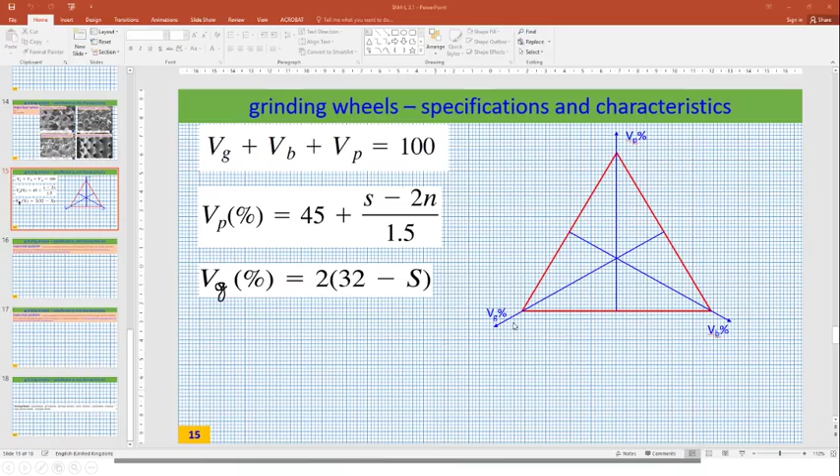There is a feedback which is coming. I don't know where from it is coming. Just a minute, bro. Hello, now the feedback has stopped. However, this is going on.

So this is lecture number 3.1 and 3.2. This particular presentation will take possibly 2 hours or more to cover this class. So today we have 1 hour, and tomorrow once again we will get 1 hour and we will cover it.

Earlier, lecture number 2.3 has been uploaded in YouTube. The channel as well as the video link has already been shared with you. So next Saturday, let me find out who is trying to join.

Coming Saturday, we are going to have quiz number 3. This would be possibly a 40-minute quiz. It will start at 9 and continue to 9:40, and after that I'll take the normal class. This would be on grinding cycle.

Hello sir, yes, I think you are muted, sir. I am muted, not able to. Okay, let me see. Just a minute. Hello, yes, I am muted. I am sorry, okay, I'll start again. Now I believe you can hear me. So already, now we can hear you. Yes, thank you so much. Thank you for reminding me that I was muted.

So as I was saying, lecture number 2.3 has already been uploaded in YouTube. The video link as well as the channel link has been shared.

Today we are going to cover channel lecture number 3.1, and 3.2 we would be covering tomorrow. Coming Saturday, which is hopefully 3rd of October, if the date is wrong I'll correct it later and post it in Microsoft Teams, we will be having a quiz on grinding cycle.

It would be primarily numerical. It would be a 40 minute quiz or 30 minutes quiz starting at 9 to 9:40 or 9:30. Once the quiz is over, after a 5 minute break, I'll take the class. So this is what it is.

Your performance in the quiz is very good. The average of the class is very nice. Hopefully the performance is individual performance, not collaborative, that is up to you. I hope people are not taking help from each other and attempting the quiz on their own.

So I'll display the quiz marks for some time. It would be posted very soon. So this one is quiz 1, this one is quiz 2, and this is the percentage in both the quizzes.

So if you look at, say for example, Kailash Raja, his... Sir, we can't see the screen. Sorry, we can't see the screen. You cannot see the screen. Okay, what is happening with me? Yes sir, now it is visible. Yes, initially I was speaking without unmuting myself, I was presenting without sharing the screen. Something is wrong with me today.

Okay, so this is your quiz 1 performance, this is your quiz 2 performance. Let us take the example of Kailash Raja. Are you there, Kailash? Yes sir. Yeah, your performance as it stands today is 69%. So there would be more quizzes, altogether there would be 8 or 9 quizzes and 2 assignments. So you have enough scope to improve.

Another example I will take. Let us take the example of Ritesh. Are you there, Ritesh? Ritesh, are you there? If Ritesh is not there, let us take the example of Gajanan. Gajanan, are you there? Is that Gajanan? No, this is Gajanan. Gajanan, are you there?

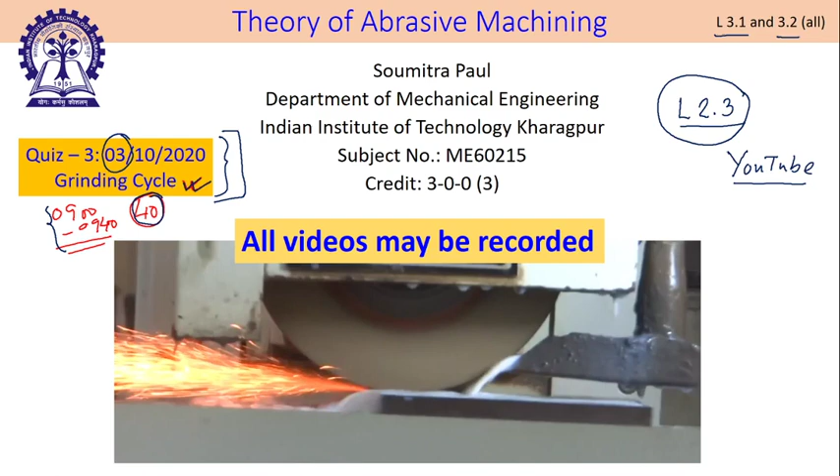So as you can see, this week's class test is on grinding cycle. So if someone says I do not know grinding cycle, you have not taught what is work speed, what is down feed - yes, the questions are on grinding cycle, but whatever has been covered from the very first class, everything is part of it. Today I do not have a table clock in my room, so whenever it is 9:55, please tell me. Let us start the class.

So today what we are going to do is talk about a particular module, module number 3. This is on grinding wheels: specification, their characteristics, and how they are fabricated. This is a descriptive chapter. Whatever I am covering in class, the same material is available in Malkin's book. Try to get a digital copy of Malkin's book, you will get to know.

Now, this is a specification of a grinding wheel. As we know, a grinding wheel is made up of abrasive and bond, and they are fired - I should not say baked or sintered, but the technical term used is fired - and then you get a grinding wheel. This is a disc type grinding wheel used in surface grinding, and in this you have the grits on them, and these grits are bonded to the grinding wheel by a bond. This is the specification of a grinding wheel, which is a conventional grinding wheel. This is a specification of a conventional grinding wheel.

What do you mean by conventional grinding wheel? The grits which are used are either alumina or silicon carbide. Other than conventional grinding wheel, there is another group called super abrasive grinding wheel. The specification system for super abrasive grinding wheel is a bit different. A grinding wheel is called super abrasive grinding wheel provided the grits used are diamond or cubic boron nitride. I believe I have already indicated that. Otherwise, at the undergraduate level also you have learned this.

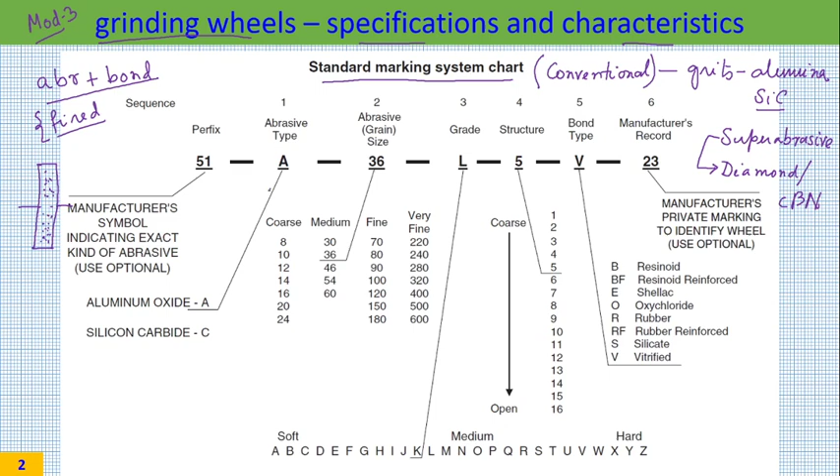Now, this specification system reported in different books is different. However, the specification given from this end till this particular end is universal. This prefix and manufacturer's ID may be there, may not be there. Unfortunately, this prefix spelling is wrong - this has been copied from Malkin's book, but however, somehow there is a typographical mistake in Malkin's book. I cannot help it.

So what is there - it talks about what is the abrasive type, what is the abrasive size, what is the grade, which is - there is another technical term for that, which is hardness - what is the structure of the wheel, and what kind of bond has been used. The other two things, that is the prefix and manufacturer's record, you forget it. You can read that from the book. I would cover only these types. So let us see what are they.

So there are different kinds of abrasives, as I said. Abrasives are alumina, A for alumina, C for silicon carbide - these are the two conventional grits. B for cubic boron nitride and D for diamond.

This is a coincidence that ABCD comes in strangely in the specification of the abrasive wheels. Abrasive type, the material of the abrasive, is indicated by the first alphabetical letter. Here it is A, so it is aluminium oxide. Had it been C, it would have been silicon carbide. Had it been B, it would have been CBN, but other specifications would have been different. Had it been D, it would have been diamond.

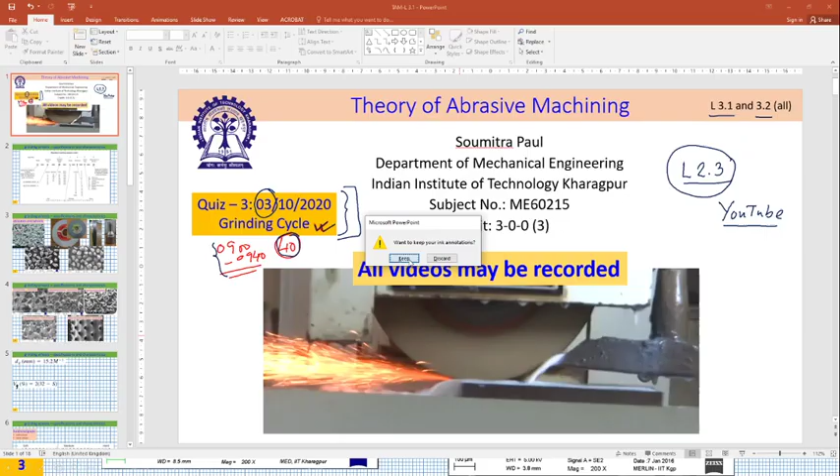Now these are this type of wheel. These are disc type wheels which are used for surface grinding operations. This type of wheel can also be used for cylindrical grinding and centerless grinding operations.

For surface grinding operation, typical diameter is 150 to 250 millimeters. That is the typical diameter. For cylindrical grinding, it is much larger.

I do not understand why am I getting a request all the time. Is someone joining? What is happening?

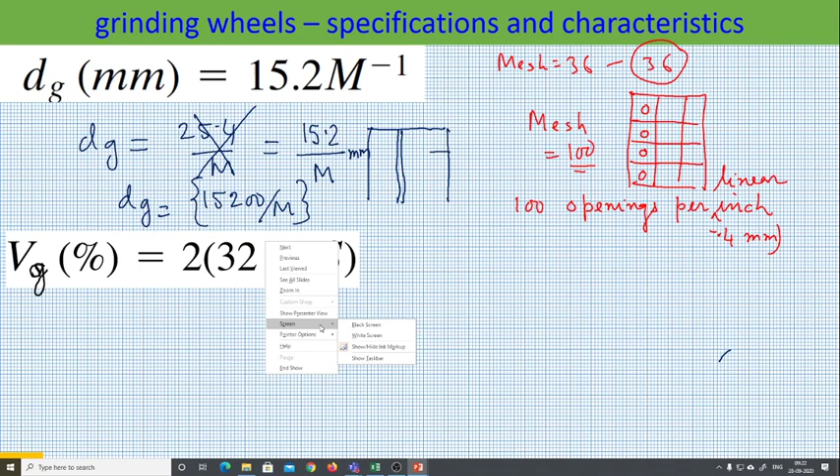So the next one we are going to discuss is structure number. Typically structure number is specified by S, and structure number physically specifies the percentage of void space.

Sir, yes sir, Shiva Shankar is waiting to join. Can you please add him? What is he doing? He is joining, he is going out. Sir, actually he was disconnected. But if he gets disconnected, he can join without my permission. I do not know how he is trying to join. Fine, so I have admitted him.

So structure number basically shows the percentage of void space, or it can also physically characterize inter-grit space - that is, how much space is there between two grits. This is what it specifies.

If you have more void, it is called an open wheel. If you have less void, it is called a closed wheel.

What numbers can S assume? S can assume a number between 1 to 15. If it is 15, 16, 14, that means there is a lot of void space. If it is 2, 3, 4, 5 in that range, it is rather closed - it is not coarse.

This is wrong once again - it is closed, it's a closed wheel, and the other one is an open wheel. Malkin's book, it seems the second edition has a lot of typographical mistakes. So this is a closed wheel, and this is an open wheel.

So this is what the structure number is. As I said, structure number talks about how much void space you have, and it also indirectly affects what is the volume fraction of grit present. Why?

How can it affect? Because there are three phases in a grinding wheel. What are they? You have grit, you have void space or porosity, and you have bond material. So these are the things, and they have their own volume percentage.

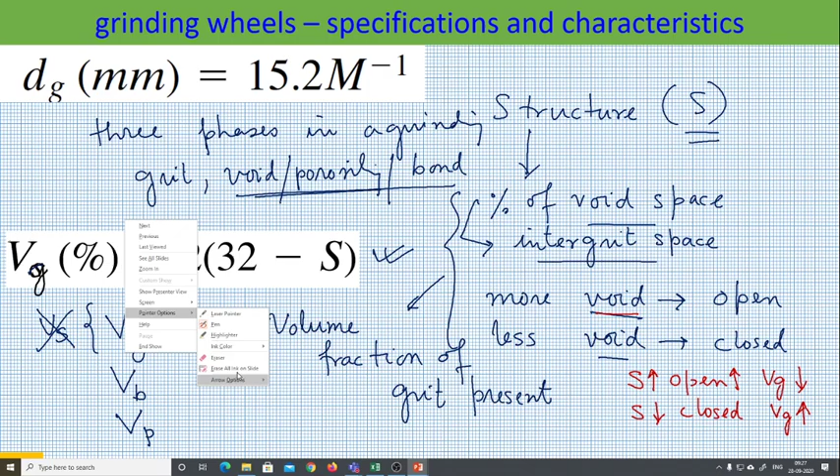So let us do a small calculation. Let us take the example given in Malkin's book, which is 5. 5 is a moderately closed wheel, from that list we have written. So if you put Vg, it is 2 times 32 minus 5. 32 minus 5 is how much? It is 27. So 54% of grit is there.

If you take another wheel which is say 12, which as per the description is an open wheel, Vg would be 2 into 32 minus 12, which is 2 into 20, which is 40%. So our conclusion is that as structure number increases, it becomes an open wheel, you have more void space, and Vg, which is the percentage volume fraction of grits, will go down. So this is the basics of structure.

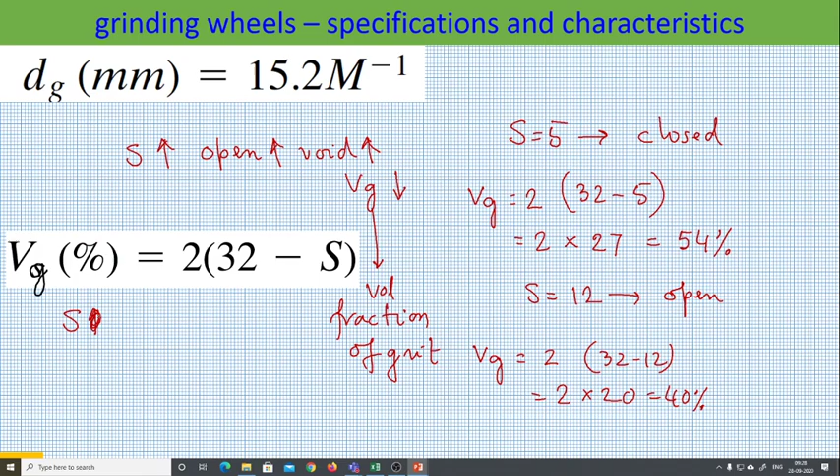Another very important thing to remember - structure number basically characterizes the void space, or how much is the intergrit space, or how much is the porosity in the wheel. Where can you see void space?

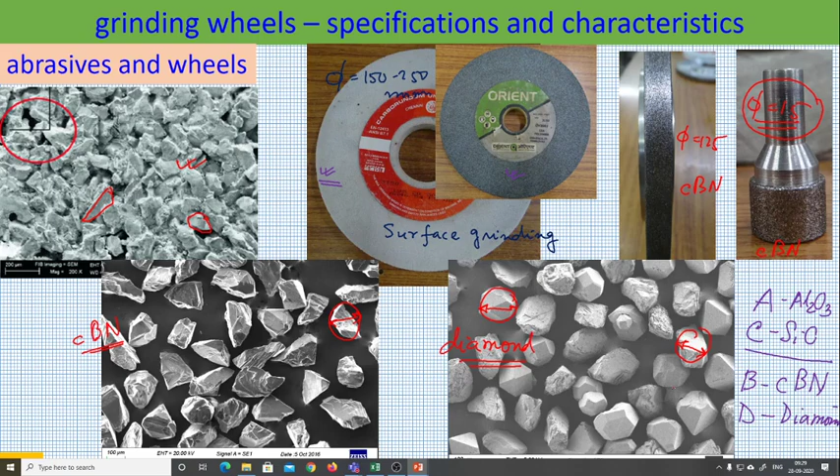Now let us come to hardness. In our example, hardness has been taken as L. What is this hardness? Hardness is also called grade. From hardness, we talk about a wheel which is soft or hard. From structure number, we talk about a wheel being open or closed. From hardness, we talk about a wheel being soft or hard. What physically does it specify?

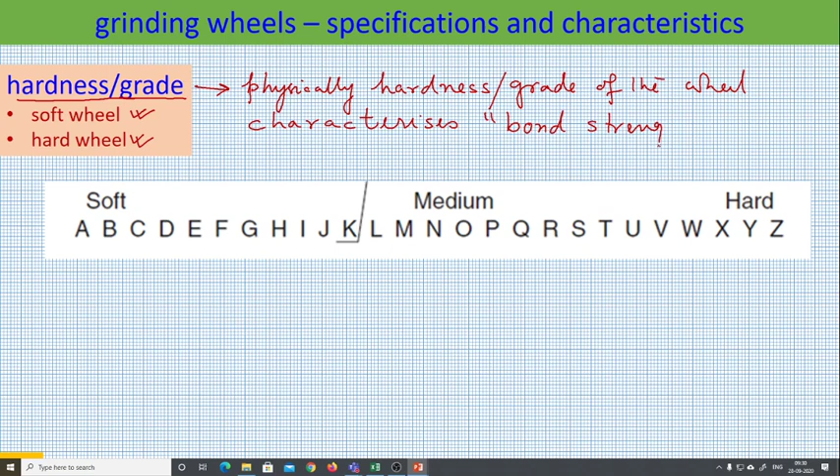Physically, hardness or grade of the wheel characterizes bond strength. This hardness of a grinding wheel has no relation to hardness as we know it.

It is not related to Brinell hardness number. It is not related to Vickers hardness number. It is not related to Knoop hardness number. None of them. Typically when we say hardness, it is resistance of a work material to indentation or scratching. But the concept of hardness for a grinding wheel is not like this.

What is the concept of hardness then? What is the bond strength? How strongly or weakly a grit is bonded to the grinding wheel.

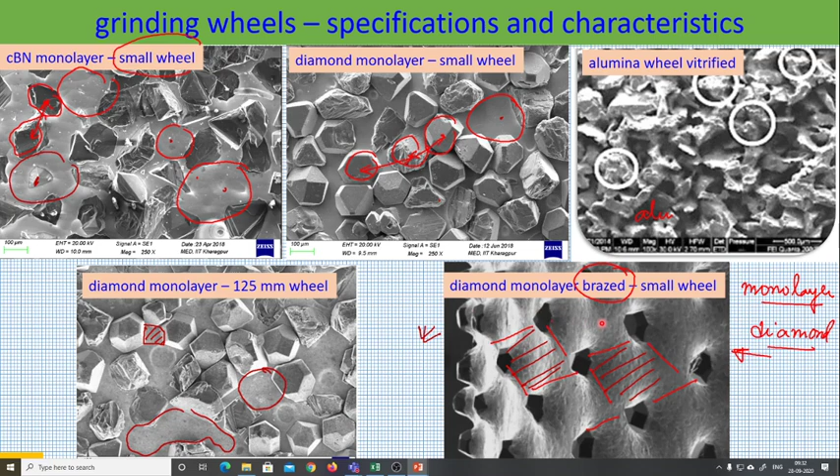Let us go back to one particular example. So here you have grits, here you have lot of grits. I do not know, laser pointer... okay. So here you have a grit, here you have a grit, here you have a grit, here also you have a grit. So how much force do you have to apply on this grit to dislodge it from its bond? This is the substrate, this is the bond material. Let me use a color.

Okay, so this part is substrate. This is the bond, and this is the grit. So how much force do you have to apply on the grit to dislodge it?

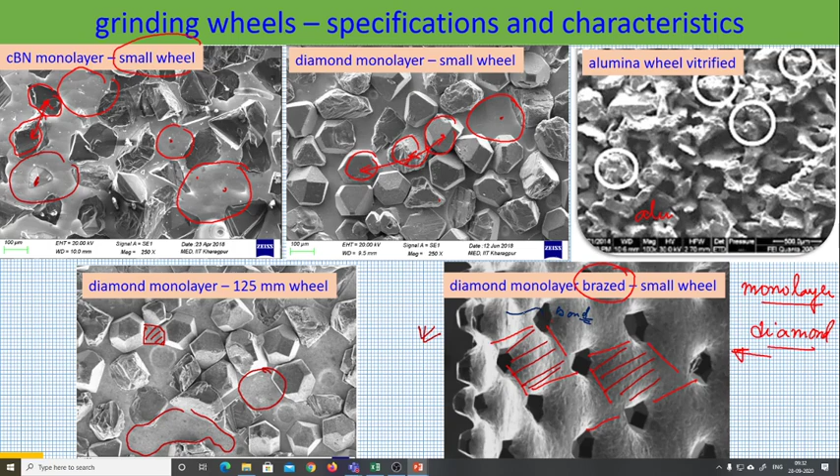Let us go back to this particular thing. So if you have a grit like this, and this is your substrate, and this is the bond material which is holding the grit in its place.

How much force do you have to apply to dislodge it? If you have to apply a lot of force, that means bond strength is high, and the wheel in that case we will be talking about a hard wheel. So wheel hardness is more, or it is a hard wheel.

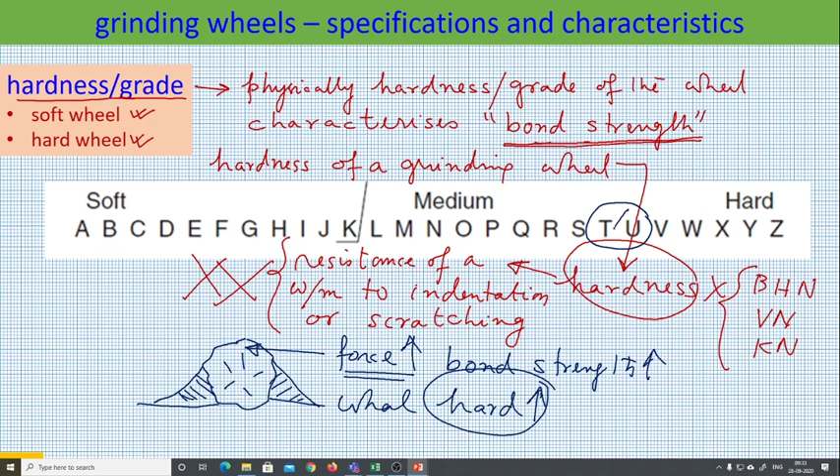If it is a hard wheel, possibly it would have a number like T or U. If it is a soft wheel, it would have a number like G and H. In our example we are using a wheel which is L, which is a medium wheel. That means if you are using one which is a medium wheel. If you are using a D wheel, it takes less amount of grinding force to dislodge the grit from the bond.

As a social example, suppose I have become very old, 80 years old, hopefully I live that long, and I have gone to the dentist, and the dentist simply pulls out my teeth. But if you go now, the dentist has to put in a lot of effort. So something like a soft wheel, the force required to dislodge the grit, and a hard wheel, the force required to dislodge a grit, is much higher.

So if you are using a softer wheel during grinding, when grinding force is large, then there is a chance of grit being dislodged because of the grinding force. If you are using a harder wheel, then it would not work. You might ask, then we should always use a harder wheel. We will discuss this later on, maybe in the next class.

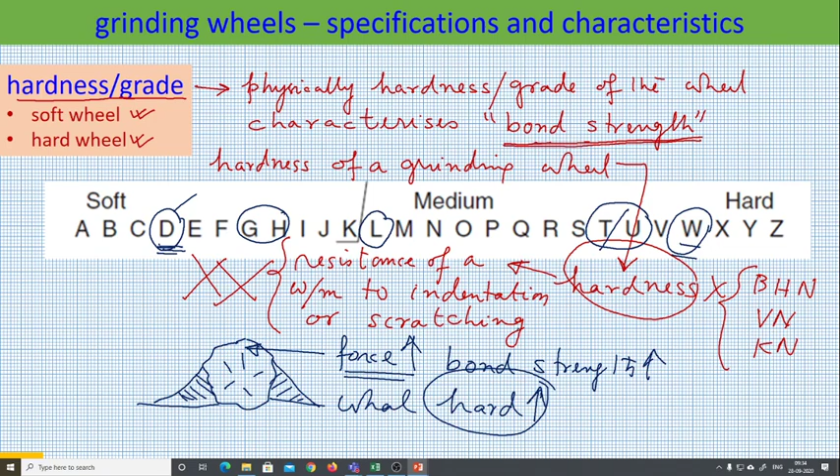Now let us go to the bond system. If we go back to this particular slide, already we have talked about abrasives, we have talked about size, we have talked about hardness, we have talked about structure. So the only thing left out is the bond system.

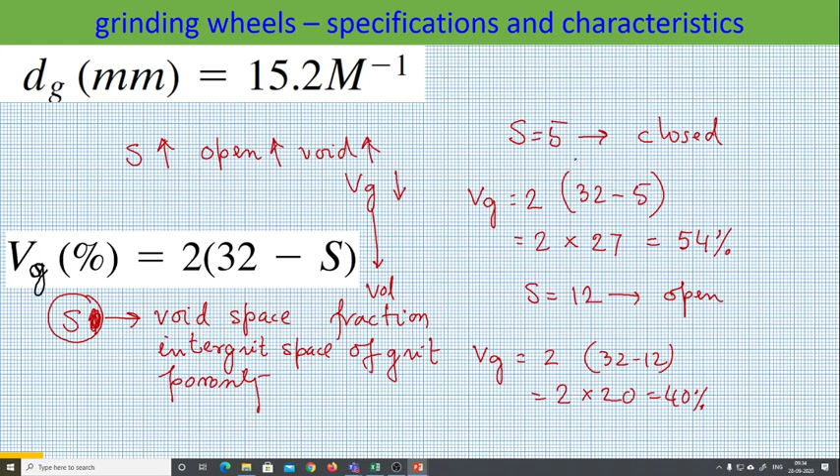If you open up any undergraduate level book or Malkin's book, that means undergraduate level books like Kalpakjian or DeGarmo, or Malkin's book, you will see a huge list of bonds. Not all of these are used.

Resinoid bond is very popular in the industry. Vitrified bond is very popular in the industry. Another one that is rather popular is metal bonded wheels, and monolayer wheels that we will discuss later on. They are also becoming very, very popular. Rubber bonded wheels we have already discussed. There is a purpose for this. Rubber bonded wheels are used wherever you require a lot of stiffness, that is lateral stiffness. Other than that, rubber bonded wheels are used as a regulating wheel. Where is it used? Centerless grinding, that's where it's used.

So we will mainly discuss resinoid bonding and vitrified bonding. At the end of the course we will talk about monolayer bonding. Metal bonding is still very popular, but I will not go into it. Those who are interested can go through the book.

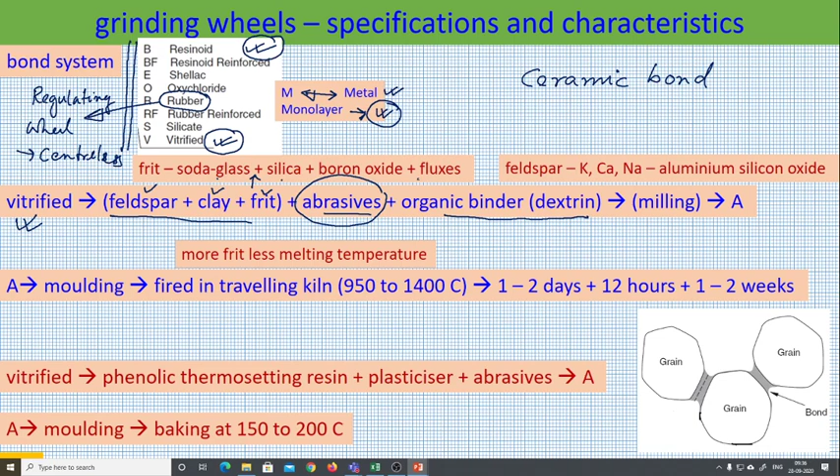Vitrified bonding - let us talk about vitrified bonding. It is a kind of ceramic bond. So what you do is take some ceramic material, you take your abrasive, you take your organic binder like dextrin. So abrasives are these, and this is your ceramic material - feldspar, clay and frit. What is frit? Frit is this one, it is soda glass, silica, boron oxide and fluxes. These are basically whatever is left out in a glass furnace, a glass making furnace.

So in the glass making furnace, whatever is left out, that is called frit. Feldspar is nothing but potassium, calcium, sodium, aluminium, silicon oxide - so it is K-x-Al-y-Si-z-O-a, something of this kind. So feldspar is of this combination, and it is basically a low melting ceramic. With that you add your abrasive - what kind of abrasive? You add aluminium oxide. How much abrasive has to be added? That we will address later on. And you add some organic binder so that when you mix them, they become like a dough for making our chapati or parathas.

So that kind of dough, not that kind of consistency. It is much more like a paste so that it can flow. Once you have done that milling, you come to this stage. From this stage, you have to mold. Molding means it is a molding process.

So if you are making a disc type grinding wheel, then there would be a core and there would be a mold. In that you have to pour that particular mixture and then you have to fire it. Basically firing is a sintering process, but we will not call it a sintering process. We will call it a firing process.

It is a traveling furnace. Once again, the furnace word is not used, kiln is used, and the temperature is 950 to 1400. If you have more frit, the melting temperature would be less. Typically, even for a 200 millimeter grinding wheel, only one would not be fired. Possibly 1000 would be fired in a single batch.

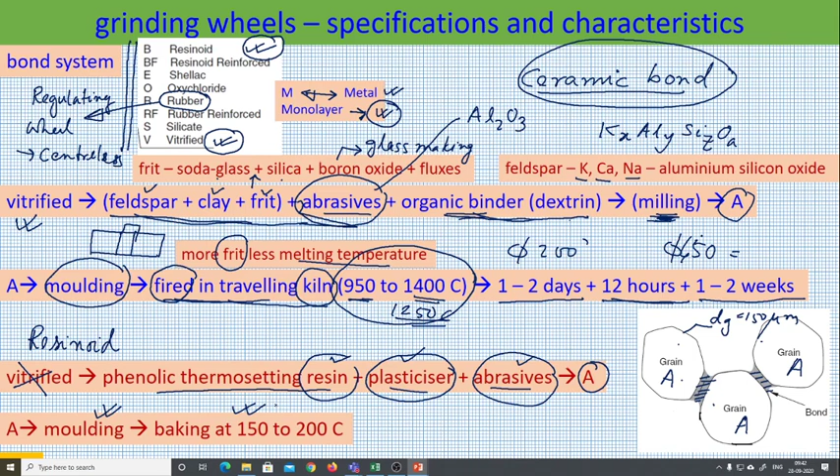We do not call it a sintering process. We do not call it a firing process. We bake it like a cake. Why? Because the baking temperature is much less, 150 to 200 degrees centigrade.

So from this, what is our takeaway? There are two popular bond systems: one is vitrified, one is resinoid.

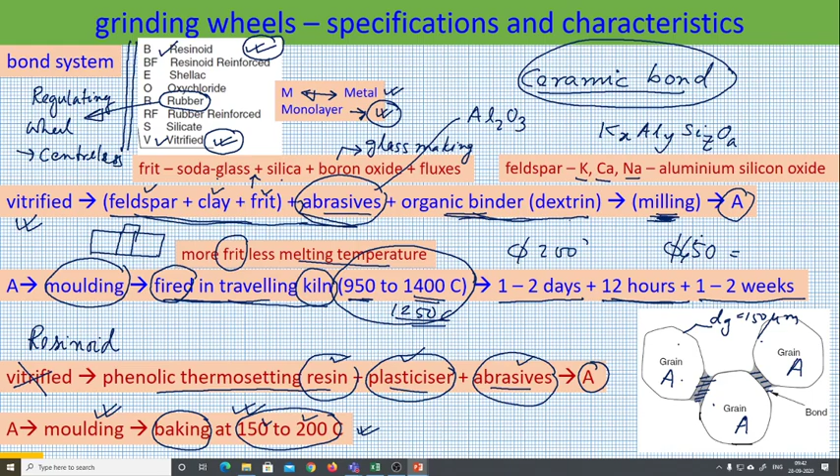Vitrified bond is a ceramic bond which takes place at a rather high temperature of around 1200 degrees centigrade. Resinoid bond is a thermosetting resin based bond which takes place at 150 to 200 degrees centigrade. So this is our takeaway. With that, we have explained all of them together.

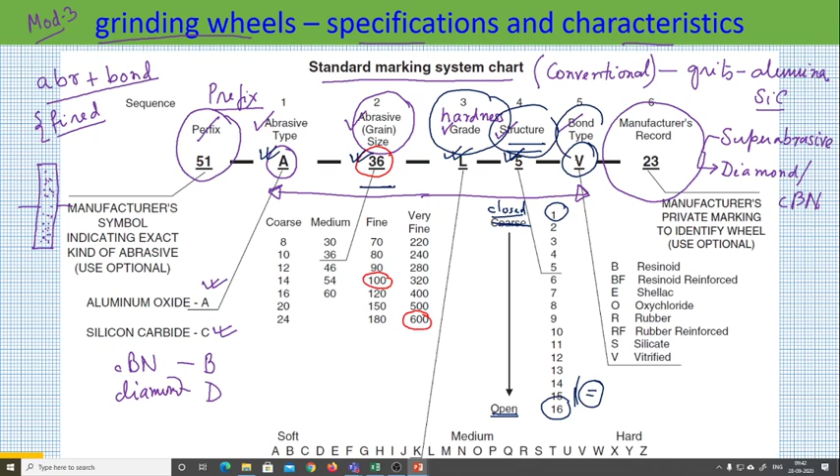So if there is a specification like this, it means this is a silicon carbide wheel which is vitrified bonded. That means possibly the bonding has taken place at 1250 degrees centigrade. This mesh size is 100, so DG is roughly 150 micron.

Why is it 150 micron? Because DG was this. This is having an open structure wheel. That means porosity is, lot of porosity would be there. Intergrit space is high, hardness is moderate. So this is not a very hard wheel, not a soft wheel. So you would require the grit to be able to resist some amount of force before it is dislodged from the bond. So this is the interpretation of specification of a conventional grinding wheel.

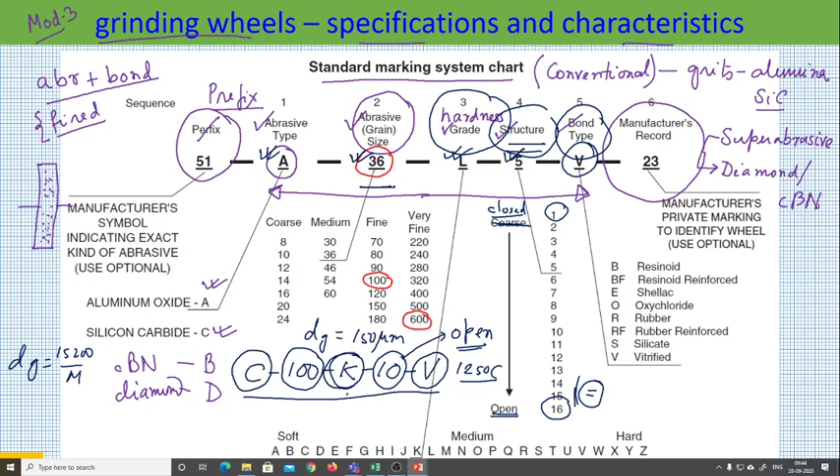So let us go back where we left off. So this is a super abrasive wheel. So what is this? This is a super abrasive wheel. How is it different?

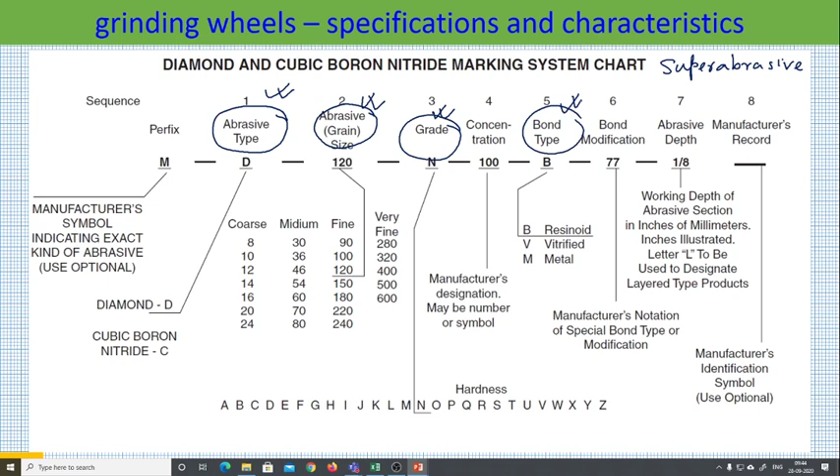Abrasive type is there, it was there. Abrasive size is there, it was there. Hardness was there, it is still there here. Bond type is there, bond type was also there. These are extra information which may be available, may not be available. This prefix is also extra information which may be available, may not be available. These are essential information which are here. So what is not matching?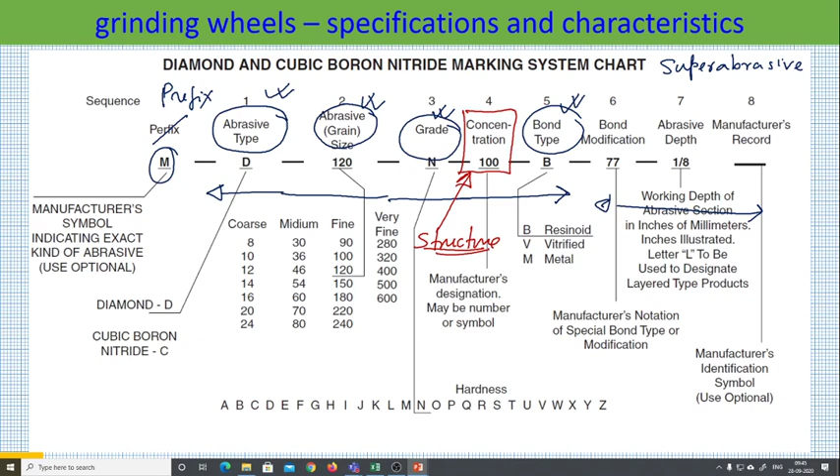There is one thing which is not matching. Let us find out what it is. So you have something which is replacing the structure number, that is called concentration. So what is concentration replacing? It is replacing the structure number. So that we have to discuss in detail. Rest of the things are the same, almost 1:1. Not almost, they are 1:1.

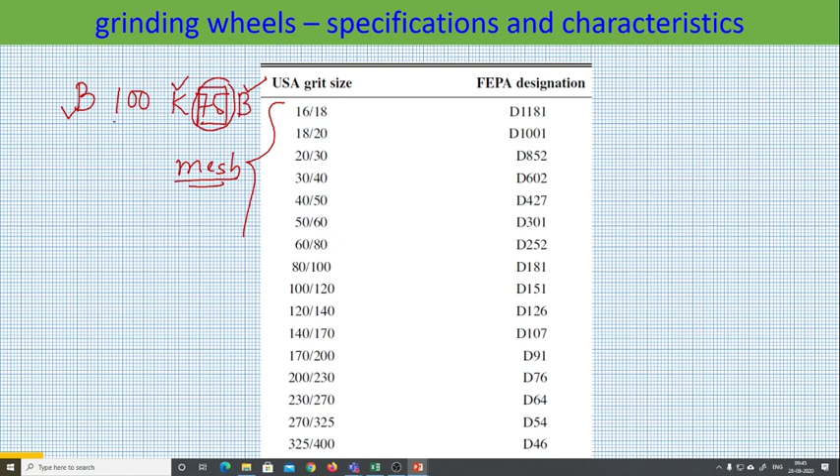Now we would be using mesh size. That means if we write a specification like this, this is a ceramic CBN wheel having moderate hardness which is resinoid bonded. We do not know what the structure number is. We will come to that later on. And this is the mesh size. That means your DG would be 152 micron.

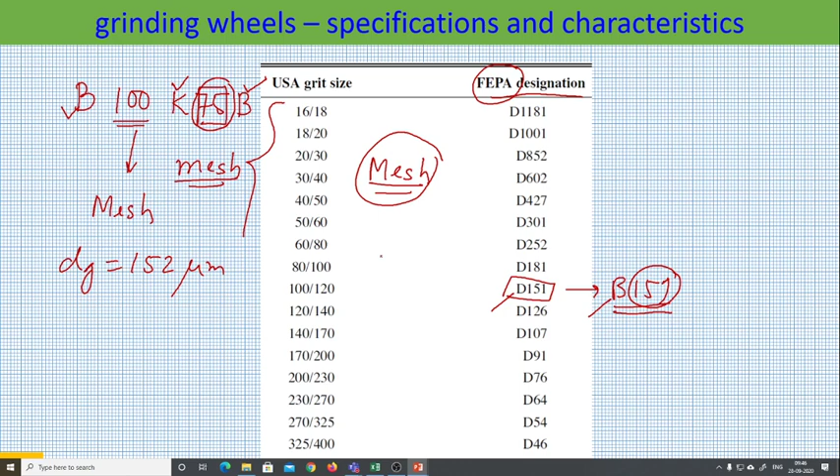However, in Europe, for a super abrasive wheel, they would rather say this is a B151. This example is for diamond, I am giving an example for ceramic. So if it is a European specification, this 151 would correspond not to mesh size, but grit size. For our course, whenever a grinding wheel is specified, it is always mesh size. Please remember this, do not make any mistake while solving problems. For our course, we will be using mesh size as the specification. We will not use the grit size specification or FEPA designation. We will not use European designation. We will use American or British designation for our course.

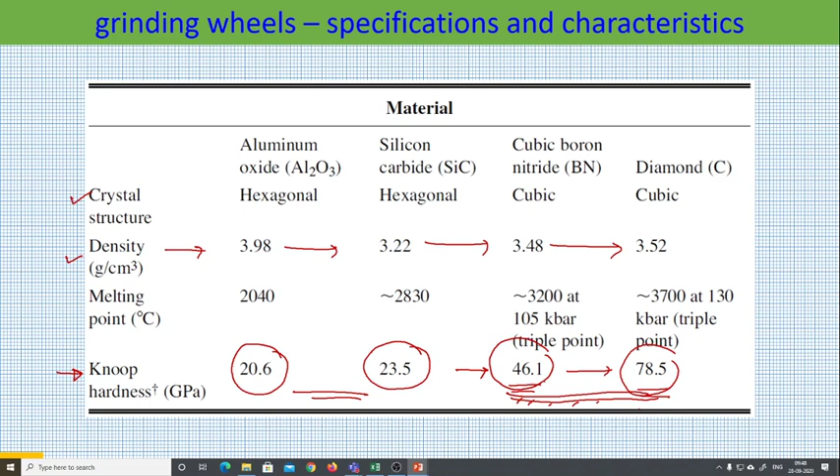So they can be used much more aggressively, as you can understand by looking at the basic material property. Now there is something called friability index. I'll come back to friability index in the next class. Concentration also I'll come back to later on. So I'll stop the class here today. I'll take the attendance, and while I am taking attendance, you can look at your performance.